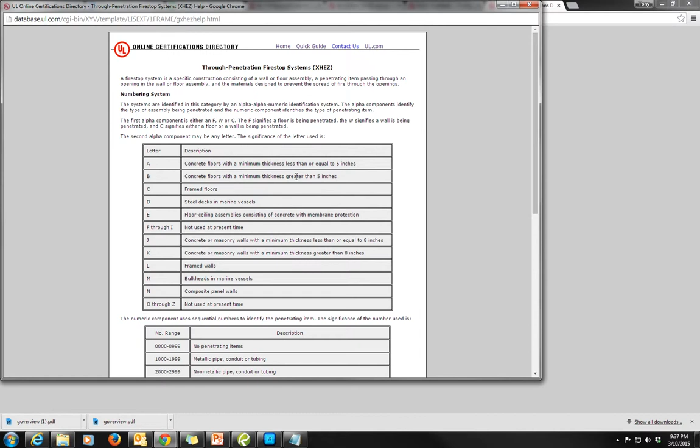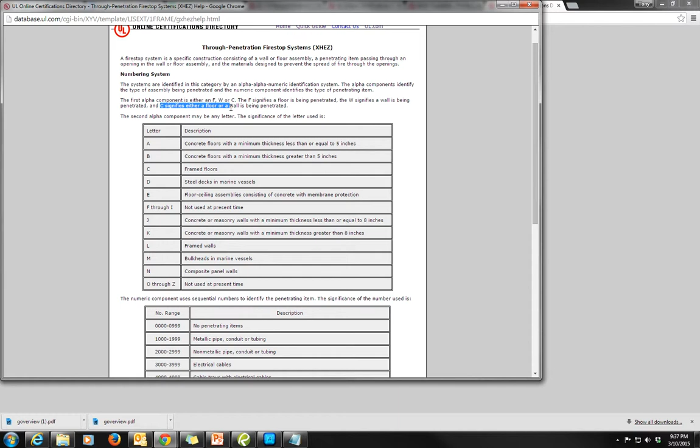Alright, so this should be a little bit bigger, I think, because it took me a while to find this at first, a long time ago. But the first alpha component is either an F for a floor, W for a wall, or C which could be a floor or a wall, doesn't matter. So that's the first alpha component. So there's three for this one. It's a little bit more complicated.

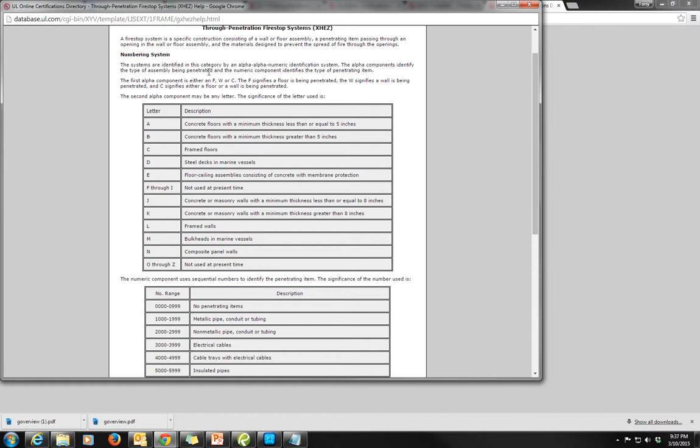Now then, what is the wall or floor made out of? That's the next. Then for the third, the numeric one, what is the actual pipe made of? Is it a non-metallic pipe, metallic pipe, a cable, pipe with insulation on it? What is it?

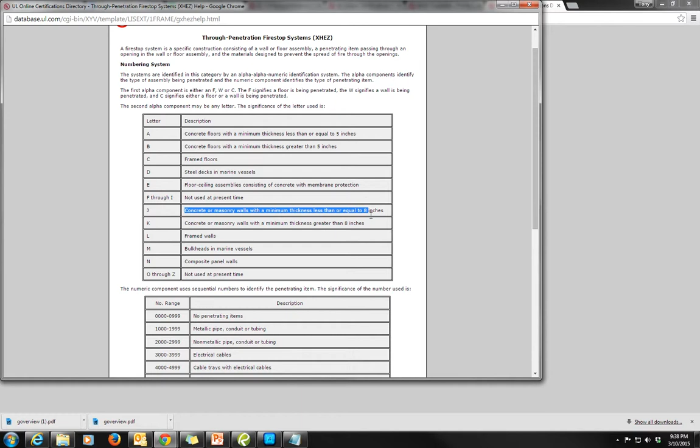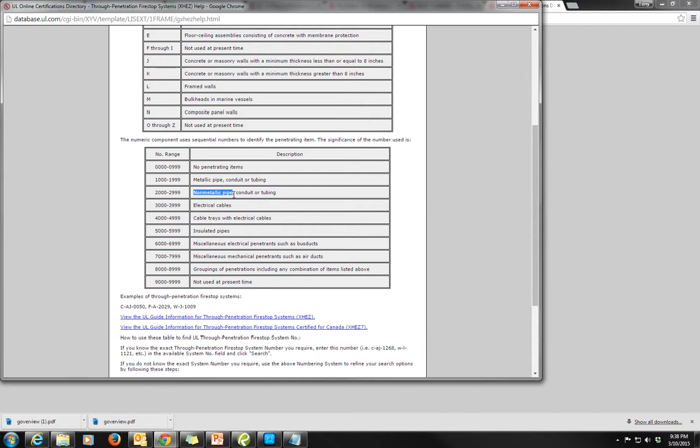Alright, so we're going to look for a PVC pipe going through an 8-inch wall. So concrete or masonry walls with a minimum thickness less than or equal to 8 inches. So we're a J. We're going through a wall, so we're a W, a J, and we're a non-metallic pipe. W, J, and a 2.

Alright, so W-J2 asterisk. We're going to search. That's a lot of results. Let's get rid of Canada.

Now this one's a little bit different. XHEZ is what we want. And we know that we are a 2-hour wall.

Alright, I took it down quite a bit. Now let's say we're going to have a 2-inch pipe. We know that. Alright, still got a lot.

Now let's say we like to use Hilti products. That takes it way down. We only have 2 pages now. We can start looking through these. Some of them will have a sleeve, some of them won't have a sleeve. Now if you try to type in no sleeve, that does not work. I've tried.

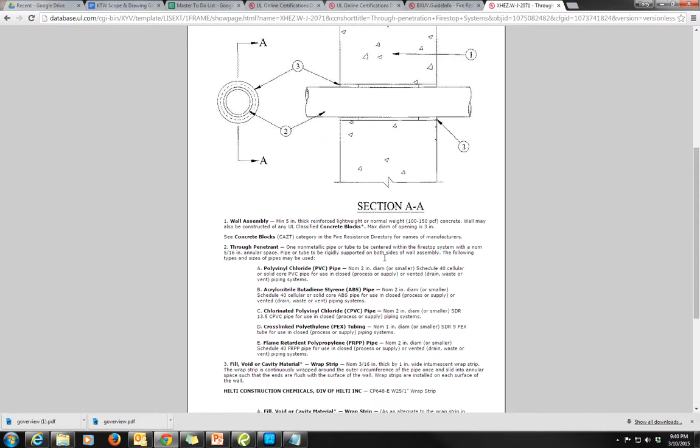But you may find some other factor, as far as the size of the opening, the annular size, that could distinguish it. Steel sleeve. Page 2.

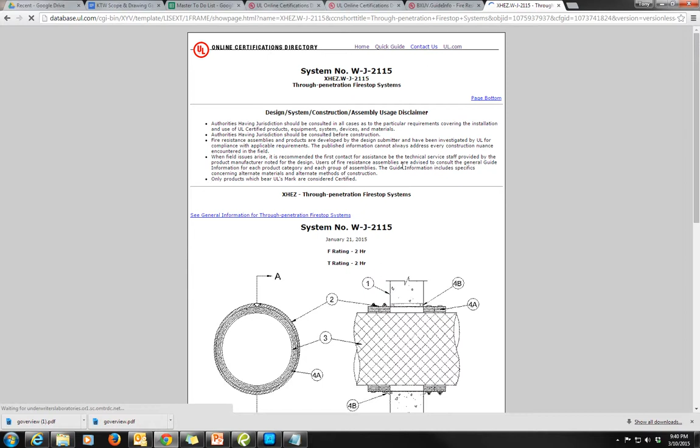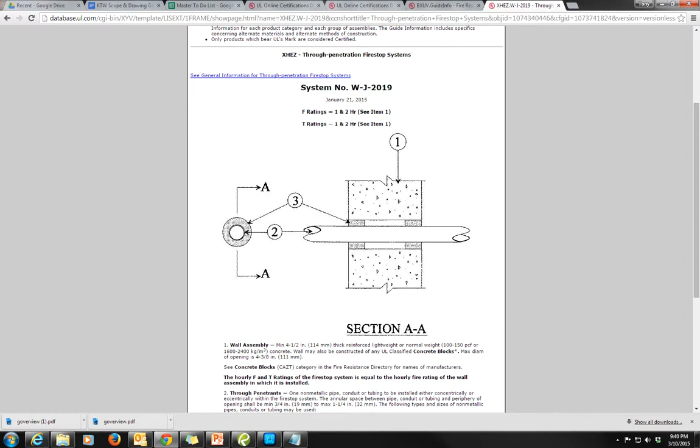In general, I find some of the first ones meet the needs for the most part. The older the UL assembly or joint or penetration is, the lower the number is. The newer something is, the higher number is going to be.

So now let's go back and let's search for something else. Alright, we have, let's say, a group of cables or a cable tray going through a gypboard wall. Now this one can be kind of difficult.

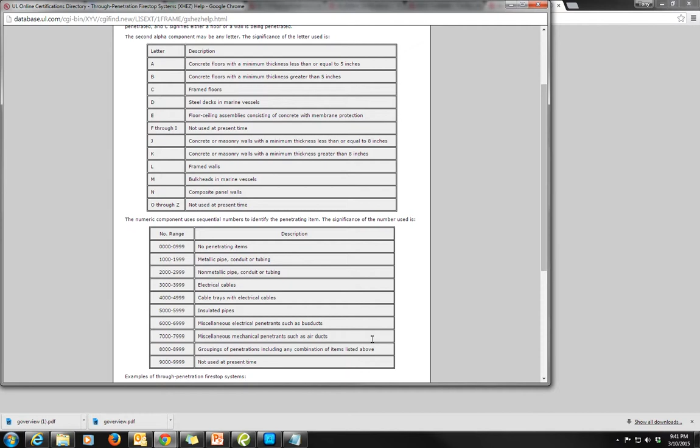So we have a wall, it's a W, and our wall is made out of what? A framed wall? Sounds good to me. WL, and so we are a grouping of penetrations. Or are we a cable tray? We said cable tray, so let's go with cable tray. WL4.

Alright, let's get rid of Canada. And our wall is 1 hour. Narrowed down the results. Let's look for Hilti again. 1 page. So that was pretty fast to narrow things down.

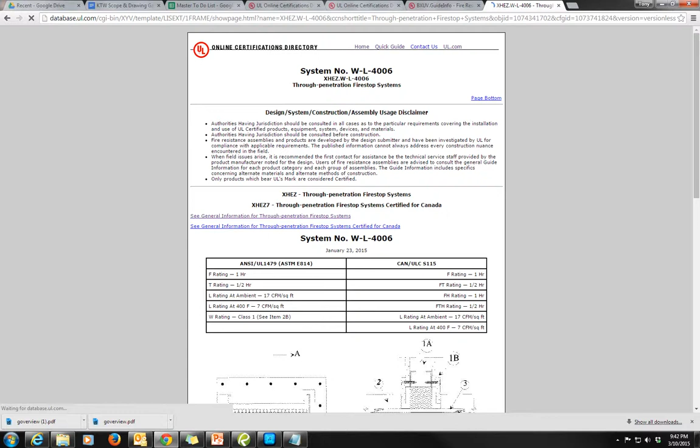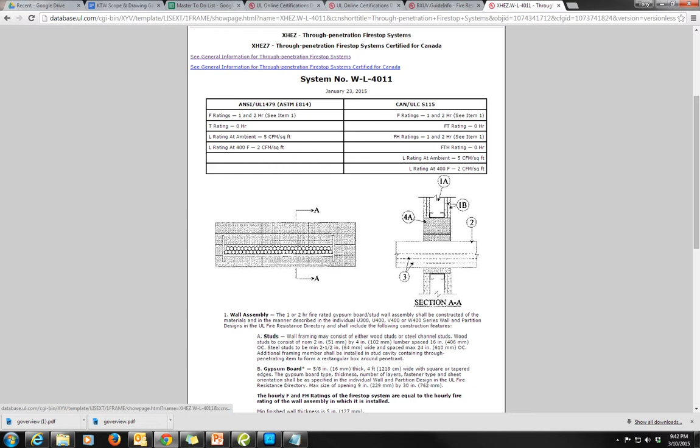Now we can take a look at this and figure out which one we like, which one we don't like. Maybe we don't like any of the Hilti, but for instance, this one uses a fire block. Fire blocks is for another video, but they're pretty cool. A little bit expensive, but pretty cool.

Alright, so that's how you search for UL rated fire penetrations.